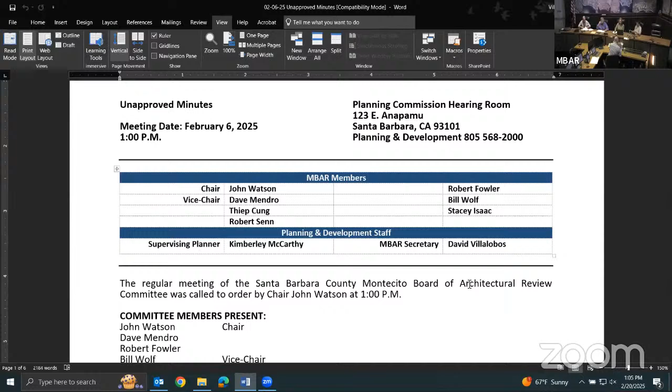Yeah, I thought I made reference to this, and I don't know if it's properly explained in the minutes, but number 2 says MBAR likes the architecture and site layout, and I thought the pool hardscape layout in general needed to be a little more traditional, and I thought I alluded to that in the meeting.

Do you think the item further down, enhanced project design, particularly landscaping, refine details to establish a more resort type environment, covers that, or do you? No, I wanted to give them clarity that the hardscape needed to at least have a bit more old world quality. I thought it was kind of modern in the way it was laid out, and it just needed a little more of a nod to that. I didn't have a problem with the location of the pool and so forth, but just the form of it seemed very modern, and I thought I made that comment.

Okay, so do you have specific language? I think this should be a new item, number 11. Do you have specific language you'd like to suggest? Pool hardscape, to invoke a little more traditional flavor or style. Okay. Is that it? Is that all? Yes, that's that, yes.

Is there a way to add something to number 7? That's what we're trying to figure out right now - can we say that enhances overall presentation of the project? We don't know what that phrase means.

Part of what I was suggesting was that the retention basins were poorly located and they compromise the ability to create a nice perimeter presence and a resort style presence to that project. When you have retention basins, they tend not to look good right in your face. So if there's a way you can phrase that - you have great command of the English language, maybe you can come up with something.

Those are two different things, I think. No, but there was a couple of locations where that occurred - that was another location. So there's two different locations where alternate stormwater solutions would better this project.

Shall we just leave it the way it is? Is that okay with you, Rob? I was the one that brought it up. Study alternative stormwater solutions - they're on their way to the planning commission. I'm just trying to give them something to hang their hat on. They got more or less positive comments and they have to address some things. Great, I think they're fine - they'll come back with better landscaping.

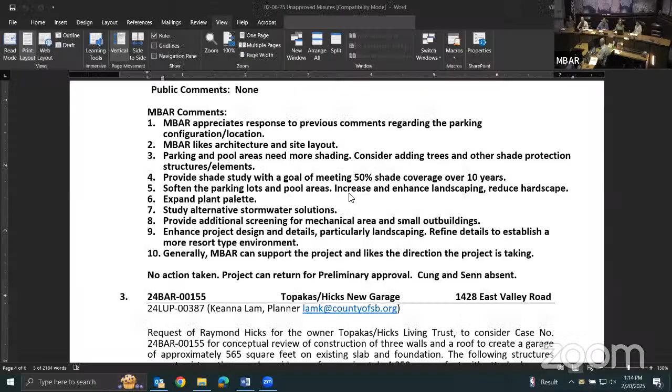488 Barker Pass Road. Is there anybody here for that, please? Hi there - first time. Go ahead, Daniel Widlowski with Richard Beard Architects, joined with Kristen Stoyanova from Richard Beard Architects and Chris Merritt from Ground Studio representing the project, and the owners are listening in. Are we ready? Yes, please go ahead. Okay, sorry.

Can you go to the next page? This is a project up on an undeveloped lot on Barker Pass near the top. It's for a young couple looking to raise their two young boys. It's a high fire area, and the project plans to comply with all of the Montecito high fire regulations and is fully sprinklered. It's a 3,600 square foot residence, 530 square foot detached garage with a small utility basement for mechanical, and the total project size is just under 99% of the MBAR recommended FAR.

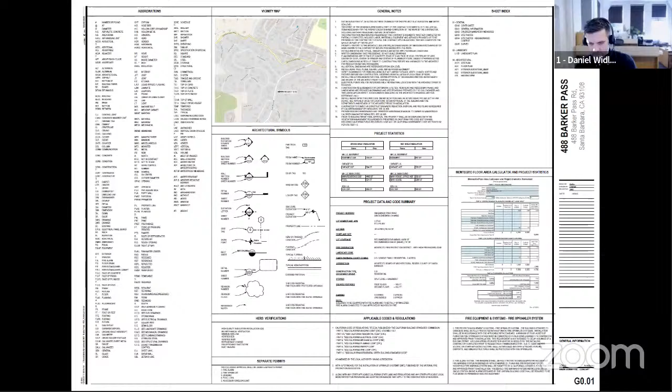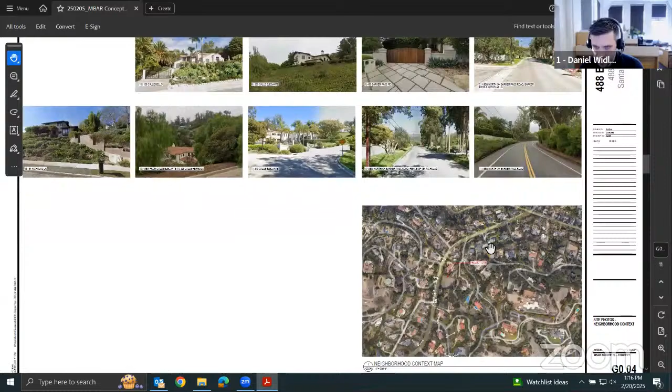Next page. This is our neighborhood context from the aerial - if you just pan down briefly, please. Thank you, you can see it's a classic Montecito level of development, and you'll notice the varied nature of roof styles, directions and massing, and we're drawing from that with our neighborhood context. If you go up to the images, you can see we're capturing glimpses of a few different classic Montecito typologies, many of which are pulled off of the roadway pretty substantially, which is part of our design direction as well.

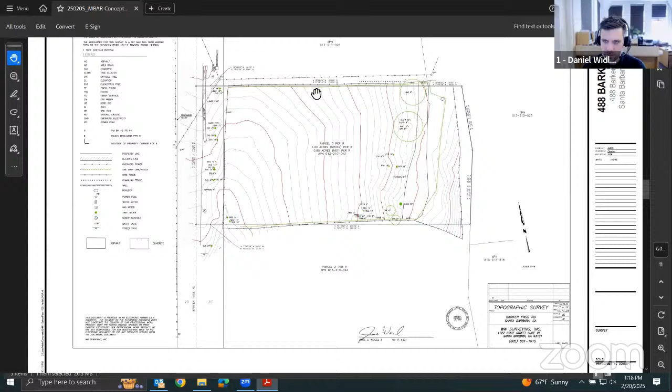Next page. I'm going to skip this page for now, and we'll come back to the landscape plan, and I'll have Chris speak to this part of the project, if you don't mind going to the next page.

This is our architectural site plan. The plan is oriented true north, so you can see we're working with west-facing facade elements. The site has that cross slope, and we're really working to pull the house off of Barker Pass Road as much as we can without requiring a fire truck turnaround. We're trying to nestle it in along the existing contours, again, to work with that landform and prevent the requirement of any extremely large scale retaining.

The maximum retaining wall height at this point is 3'6", and it's actually at the southeast corner of the pool, holding up that existing large date palm.

You'll see the garage is detached, and then we have the long gabled wing there in the middle. That's our public spaces. And then the bedrooms are pulled further up the hill. We have a long bar with a flat roof proposed so that we can conceal PV panels in our PV array. And then the primary is that small gabled structure pulled the farthest up the hill, overlooking the date palm and the pool terrace.

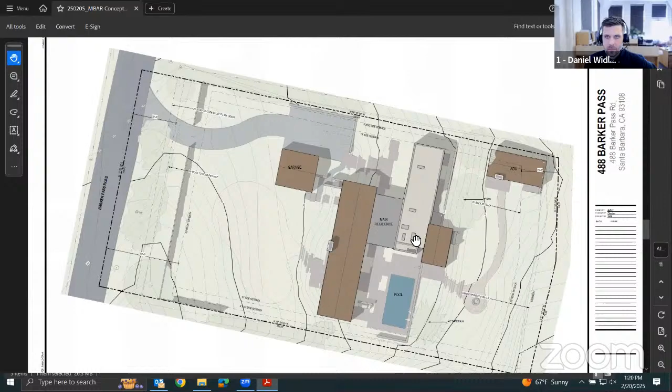Again, we have the public wing at the front of the property, so to speak, and then it gets more and more private as the volumes work their way up the hill. Thank you.

And then the pool and pool terrace are all pulled to the rear of the structure so that they're screened from the roadway and create a nice private feeling in the rear yard. And then much of the upper area, I'll let Chris speak to this more directly, is meant to be returned to the garden state.

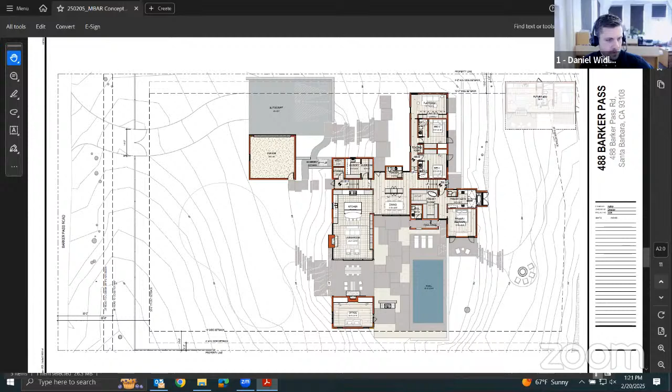So you can see from our exterior elevations, we're trying to draw from the historic context of classic Montecito and Santa Barbara language, paying a nod to the local vernacular of the agrarian region we've settled in, and elevating it to be a little bit more in tune with a modern family and their lifestyle. So you'll see common material elements here: stucco render with a smooth skip trowel finish, some limestone intermixed with some Santa Barbara sandstone.

And then in this rendition, we're showing a clay tile roof. We're using the site and the topography to try to conceal the massing as it works its way up the hill, and it's a one-story house. We're well below the max height limit with any of our ridge lines. And the garage is turned with a single window facing the street to be a charming entryway to the property.

And then the lower elevation here, the east elevation, you can see we're nestled into that hillside. So this is from the uphill looking down the topography. You can see the bedroom wing and the primary wing are sort of buried in the hillside a little bit in this view. They're not really, but they don't project much if you're looking at this from the uphill side where you might be trying to look over the building.

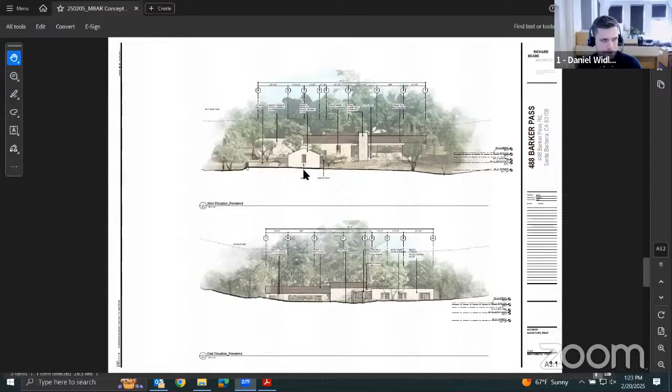Next page. These are the long sections through the site, looking at how the massing steps its way up the hillside, revealing each volume sitting on a portion of the property that's level to it. So it's a multi-split level house, but again, all one story as it climbs up the gentle slope.

On the top elevation, you're looking at the backside of the office, across the pool terrace to the dining room and bedroom wings beyond. You can see the garage on the left, tucked down in the hill. On the lower elevation, you're looking through the auto court at the garage, again, not facing the street. The steps climb up that slope to the front door, between the gabled volumes and the flat roof volume there, in this moment where the landscape is extended across the site.

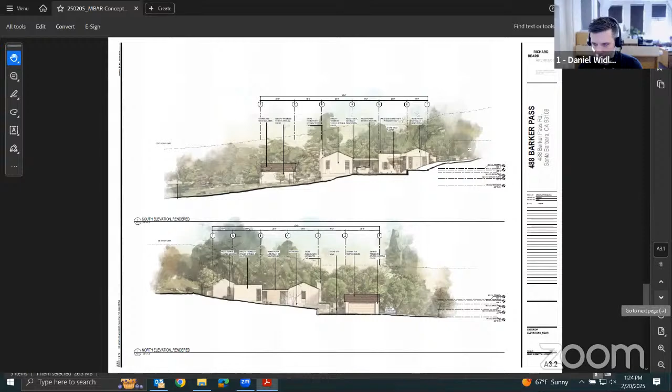If you go to the next page, we have a massing view to help illustrate how these forms unfurl on the land. Probably familiar by now, but the small garage and then the long gabled volume with the stone fireplace is the main public space, with the bedrooms tucking in behind, and the pool terrace. You can see the existing vegetation rendered here in a kind of transparent green.

If you don't mind going back to the landscape plan, I'll let Chris Merritt speak to that. Thanks, Daniel. From the aerial axon perspective you saw on the last page, the bulk of the work from a landscape perspective was siting the building with Richard Beard's team, seeing how we can nestle it as much as possible and get the site as balanced as we can.

It's early days from a landscape perspective, but we're looking at roughly about 500 cubic yards net import, or less.

From a design intent perspective, we really tried to consolidate most of the public space and contemporary landscape directly around the main house, between the bars of the building. Then on the east and west side, reintroducing oaks. The neighbors to the south and north have existing live oaks, so we want to continue that oak woodland thread. Our goal is to create a reinterpretation of an oak woodland on both the east and west sides of the property, again consolidating more of the paving and hardscape directly around the house, so the building is enveloped in a garden and nestled well into the site.

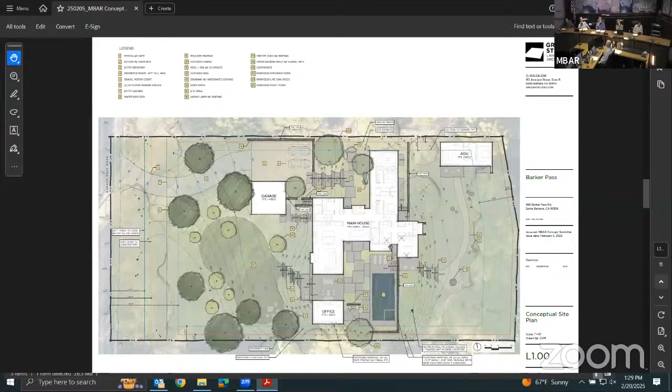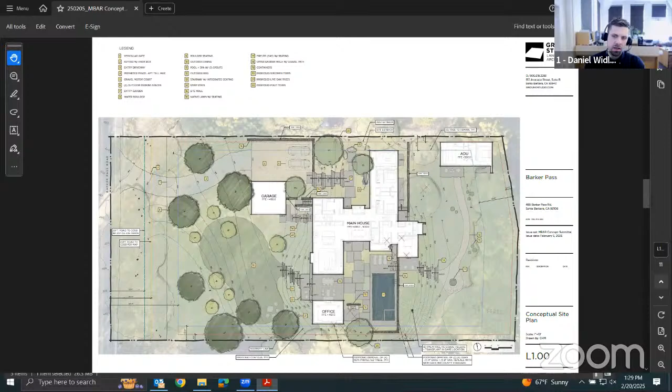In working with making sure that each of the bedrooms can daylight out for emergency egress, we've pulled some of the volumes so that the rear face, the uphill side, is level with the terrain as you exit. That required some imported fill on the low side to hold them up, if that makes sense. And we've done that in a few instances to help balance the cut where the pool exists and where some of the other parts of the massing exist.

Yeah, where the pink line is, where I just drew, that's existing grade. So the finished floor of the house is set at that pink line, which is essentially the midpoint between the two bars of the building. So we're cutting a little bit uphill with the goal of keeping the walls low, like Daniel said, 42 inches high max, and then having to fill on the downhill side as a result.

Okay, great, no more questions. Thank you. Todd, please.

Where's your ocean view? I thought that area had ocean views, or at least some places around. No views on site, unfortunately, none this time. Okay, I'll clarify, if you walk right up to the very top you get a very understory sneaking ocean view, but certainly nothing we can capture from the house, unfortunately.

Okay. And then what is the thinking with the first thing you come up to being the garage, and it's really understated? What is the thought behind that? We're interested in your comment on that.

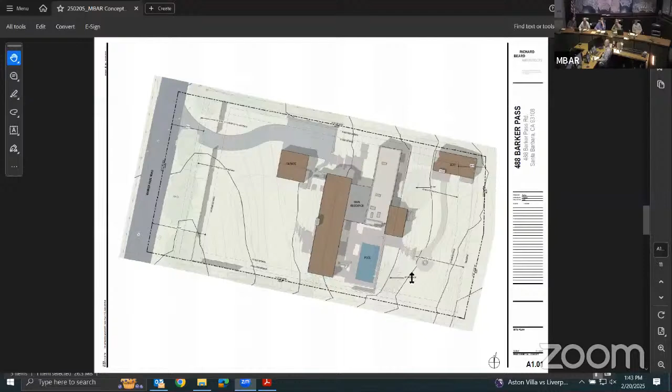I do feel it's a nice project, and as far as the garage goes, that's where I'd almost like to see a little bit more interest in some of the architecture, because the garage feels a little understated as the first thing you arrive at.

But I think if you do the front door and some of those enhancements, it'll come together nicely. So that's all I have to say.

Thank you. I don't think you should wait to go to the fire department until you file the LUP, because my guess is the fire department may very well ask for things. I understand at this time they're asking for full turnarounds.

Which we see in almost every project that comes through Montecito. That happened maybe two or three meetings ago, where people reported the fire department was not permitting anything except a turnaround, which are fairly large things on the ground.

It could move parts of the buildings around, so I would recommend you do that long before you get to the land use permit.

I think that the portions of the project that I see are pushing the north property line. I think that if we're going to maintain the perimeter hedging everywhere and the probable 5-foot area around each building, and then also at the parking area...

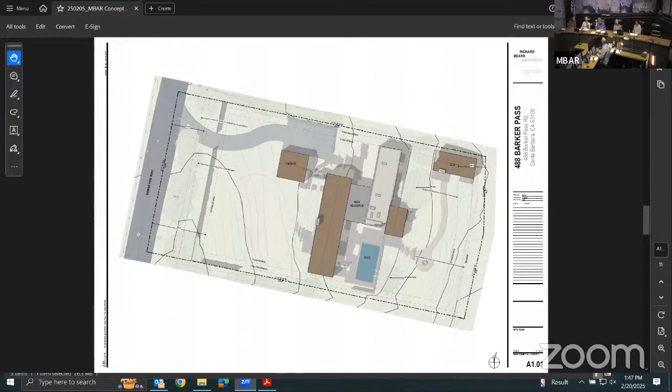Thank you, appreciate all your comments. And please do communicate with the neighbors. Absolutely - next steps are fire, neighbors, and study that roof on the north property line. Thank you so much.

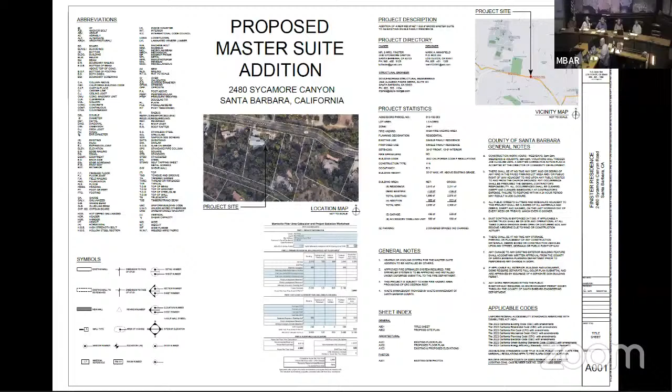Anybody here, or is it online? Yes, can you guys hear me on my end? Yes, I can - is this Mark? Yes, it is. Okay, please go ahead. Good afternoon, board.

My name is Mark Mansfield. I'm the designer/agent for Mr. and Mrs. Brian Finster. I also have the owner, Brian, joining us, just in case I don't have the right answer - he may have it for you.

So basically, what we're proposing to do here is add a master suite to an existing single-family residence on Sycamore Canyon, 2480 Sycamore Canyon. It's basically 800 square feet net, 833 square feet gross, and it's pretty simple - not a complicated design by any means.

We're far enough back from Sycamore Canyon Road, with an existing masonry wall about 6 feet tall, so you barely see the home or the addition we're proposing from Sycamore Canyon. That's probably a good thing for the Montecito area.

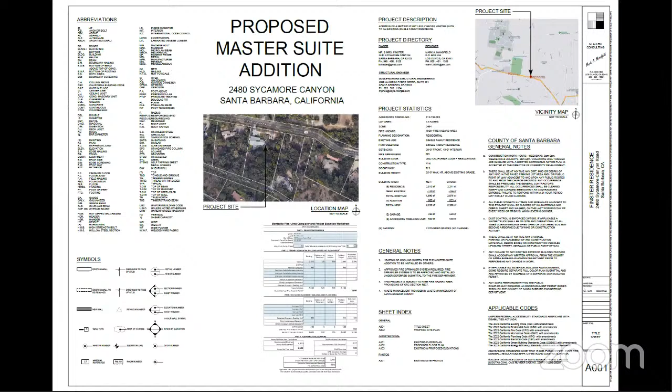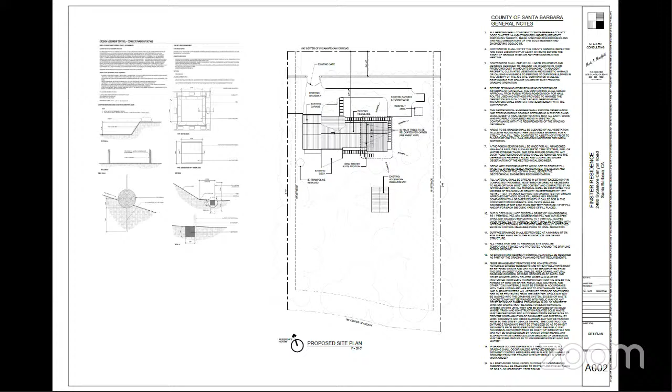If we want to, let's go to sheet number 2. There we go - there's our proposed site plan. I may want to skip back and forth a couple sheets to give you a clear picture of what's going away and what's proposed to come in. Let's stay right there - the existing floor plan. Go one more sheet, please. There we go - there's the existing floor plan as it is today.

What we want to do away with is this existing bath. The master bedroom as it is today is where my cursor is, below the lower right corner of the building. The Finsters have a 5-member family, three kids, and they all deserve their own bedrooms. So we want to take that master bedroom that's there today and do away with it. If you go to the next page, there's the master suite.

If you look a little closer at this drawing, you can see where the existing is being removed and where the new is being added - it gives you an idea of what we're doing away with and what we're adding. Basically, the existing master bedroom will still have its own bath, but the new master suite has its own bath, and the owners want an office as well. And one of the existing bedrooms above the existing master bedroom is enlarged a bit.

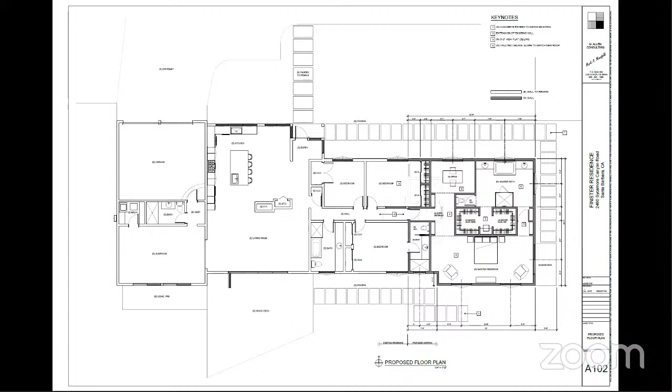If you go down, let's see how many sheets, one more sheet, please.

Elevations. So what we're looking at here is we've got our existing elevations and our proposed elevations together, and you'll be able to see where we're adding that new master suite. The very top south elevation shows where we're adding the master suite. We want to match as much of the existing structure as possible, so it looks like it was all built at the same time. I think we've accomplished that.

We went back and forth. If you're still looking at that top proposed south elevation, we were going back and forth on sizes of windows for the new master suite, and per the owner's request, we didn't want them to be too big. They want to have some privacy in there, so that's the reason for the size of those windows.

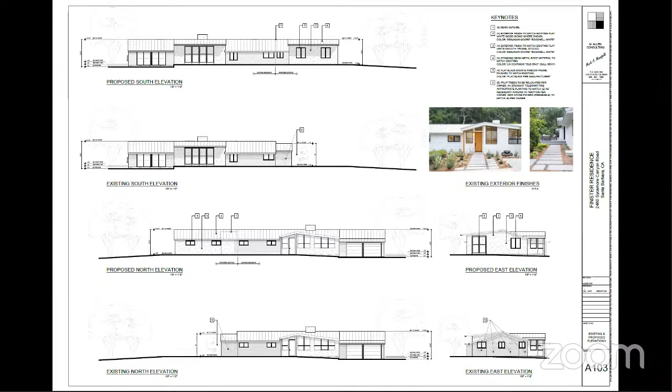The exterior finish, we're matching the existing, of course. And if you look at the photos that I've attached, the existing exterior finish on the right side of that page, you'll notice that it's white. And my notes, there we go.

Can you scroll down just a tad bit so we can see the keynotes there? I'm sorry, scroll up, excuse me. Scroll up, there we go, right there. So what we've got is two different exterior finishes going on, as you can see in the photos.

One finish is the white smooth trowel stucco, eggshell white. And then we also have this white wood siding, also eggshell white. So we're matching that smooth trowel stucco finish on the master suite addition.

I think that'll be a nice look, to where you've got it separated from the stucco finish to the wood siding, then back to the stucco finish, like you do with the rest of the house.

If you scroll over to the left-hand side and look at the elevations again, you'll see how it breaks itself up like that. You can see that in both the proposed south elevation and the existing south elevation. You've got the white siding, then the stucco finish, then it goes back to the siding. So we decided, let's have the new addition have the stucco finish.

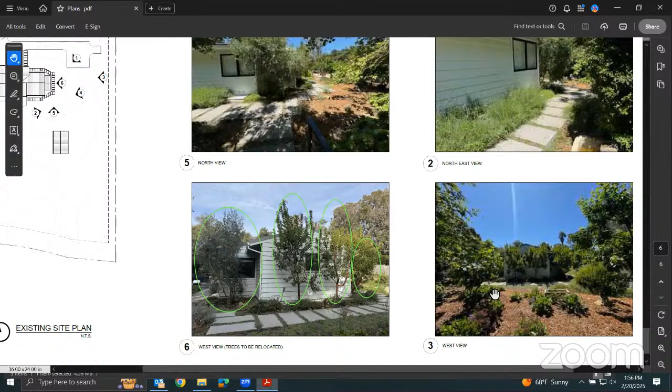If you go up to the upper left of this sheet, I think I have a little better explanation of what they are: trees, plants to be relocated. That's just 2 strawberry trees.

Mark, so this—this is our first review. I don't know if we need to get into that much detail at this point. Oh, good, that's good news, because I'm not a big landscape guy. Okay, can we move on then, please?

We can. That's basically all that I want to bring to your attention. It's just basically what we're proposing to do. Thank you very much, that's it. Questions, Robert?

No questions. Stacy, questions? One question.

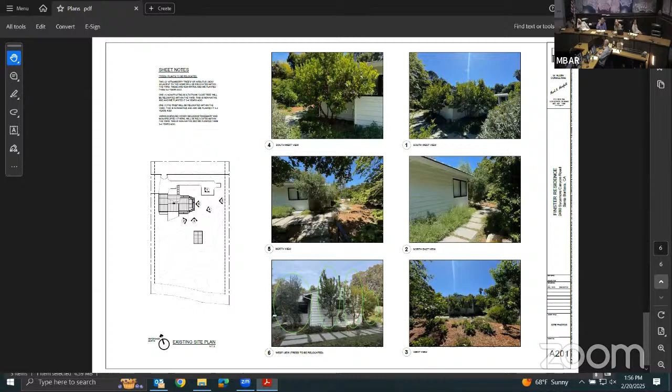Why did you go from the horizontal siding on the same plane on the north face of the house, on that same plane without any variation to the front facade, and then transfer it on the new addition just over to smooth stucco without some form of relief or transition? Are you talking about the proposed north elevation? Correct. Why did I do that?

Well, okay, I had a feeling you were going to ask me about that. We may not do that, we may just carry the siding all the way to the end. But then what do you do when you wrap around the corner there?

If you go down to the proposed east elevation, lower right corner of the sheet, that's all proposed stucco finish. So what you're saying, I understand the question. That does make sense, and that's something we can visit and discuss.

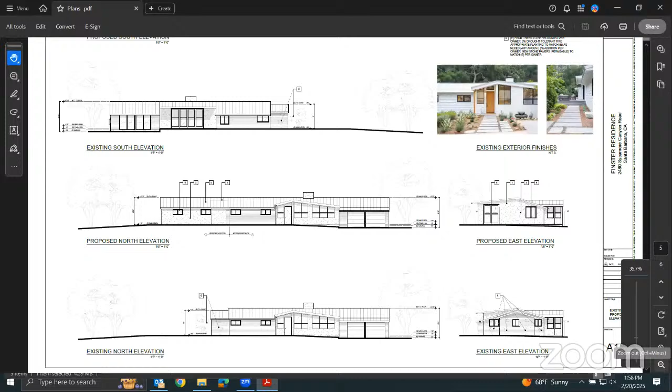If you can zoom out a tad bit and go up to the proposed south elevation, a little further up the page. We like that look where it divides itself up from the stucco finish to the siding. So I hope I answered your question somewhat.

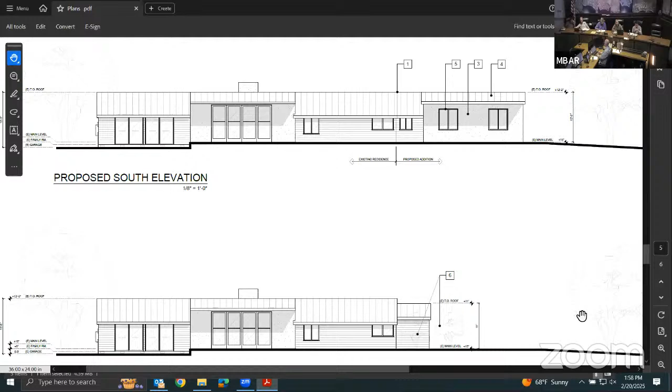We could consider that on the other side, on the back side from that elevation. That was my only question. All right, questions please. No question, Rob, questions please. Can we go to the driveway, please?

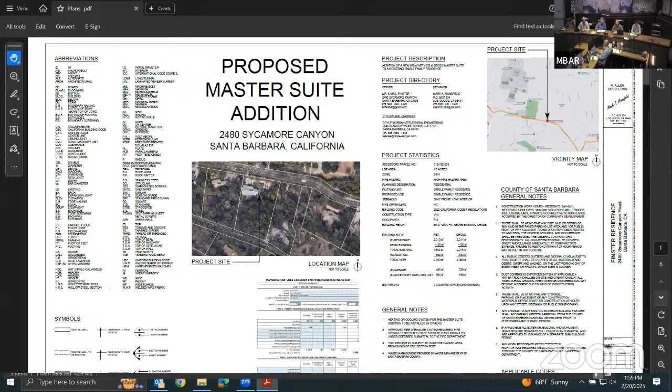You just had it. Yeah, right there, you go. You passed it right there.

Did you consider, first of all, what is the thinking in terms of the driveway and the function? Is this in response to fire department concerns, or why did you bring all this paving across the front of the house and create a whole other parking lot at the front? What is the thinking there, please? And with that in mind, did you consider stepping the new master wing back rather than having it in the same plane, since you seem really pinched because of it?

Let me see if I can understand the two-part question properly. So what you're stating is that all the parking you see in the site plan is existing, we're not adding any new parking at all. You're talking about the pavers that are wrapping around.

No, I'm reacting to this long spur of a driveway and new parking area. I guess I'm wondering, did you look at other solutions where maybe you didn't need to go all the way across the front of the house with paving? Oh, I see what you're saying. Okay, so again, I just wanted to make sure I understand, or that you understand as well.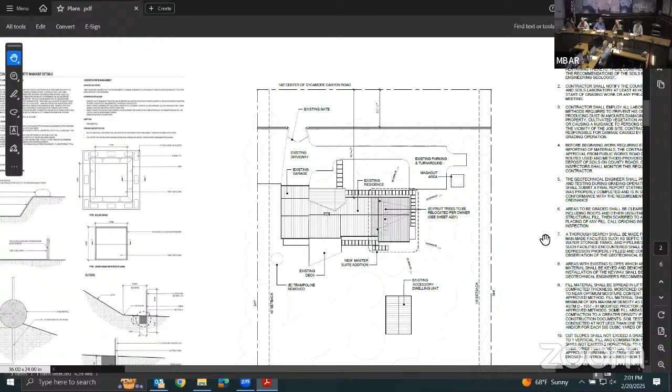So then the other question was, did you consider stepping the new addition extension back so it wasn't so pinched, and so the new addition wasn't in the same plane as the rest of the house? Yeah, we had discussed that, but the owners preferred this look better simply because they've got that accessory dwelling unit in the back, and we didn't want to get too close to it. Also there were some other trees that were much larger, and it would have been a more complicated process to move some bigger trees perhaps, and so on.

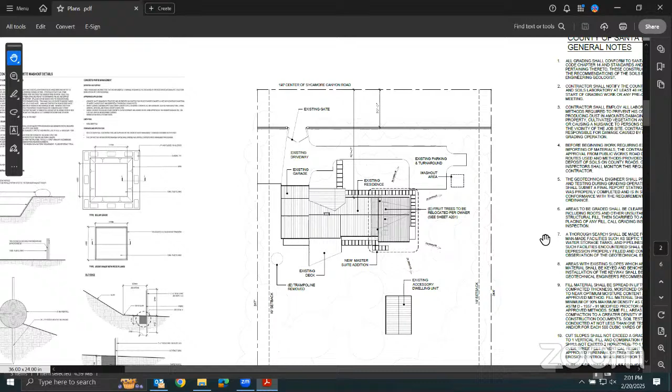And it's like everything else, cost comes into the picture as well. Also, if you go back to the floor plan itself, the proposed floor plan, one sheet down, or two sheets down, one more. It flowed the way we went. Oh, back up. It just flowed the way the owners preferred to have the floor plan designed, the way we went about it.

They like this design, it works for them. They didn't have a problem with that long extension of the elevation in the front. Thank you, that makes sense.

Were you planning on repainting the whole house when you finish this project, please? No, we hope not to. It's not cheap.

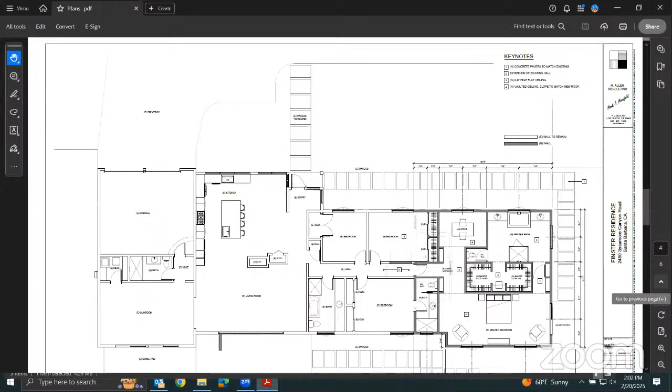If you go back to the elevations, are you aware that we only approve metal roofings with a matte finish, please? It has a matte finish. Excellent, okay. The owners had to do that matte finishing after they bought this property, from what I understand. It didn't have it when they purchased this property, and then they had to come back and deal with that.

Okay, public comment. Is there anybody that would like to address the board on item number 2480 Sycamore Canyon Road, please?

No requests. Okay, this is the first time we see this project.

Comments, Robert? I feel it's a modest and well done project, and I think we should just move it forward.

Stacy, comments please. I agree with Robert. It's a modest project, and overall pretty agreeable. Just two comments when it comes back, and I'm fine with it moving to preliminary: restudy the window at the office, perhaps making it larger so that there's some relief in the facade, so it doesn't feel like a long tract home. And then just think about that breakup, because usually if you're going to change materials, there's generally a shift in the planes and the spaces just to justify that change of material. But I would say it's still fine to come back for preliminary if you would just please consider those factors.

Yeah, comments please. It's definitely a modest project. Just a comment, I'm looking at the scale of the master suite compared to the scale of the whole house. It seemed to be rather large, but that's not what we are here for, so I think it's okay.

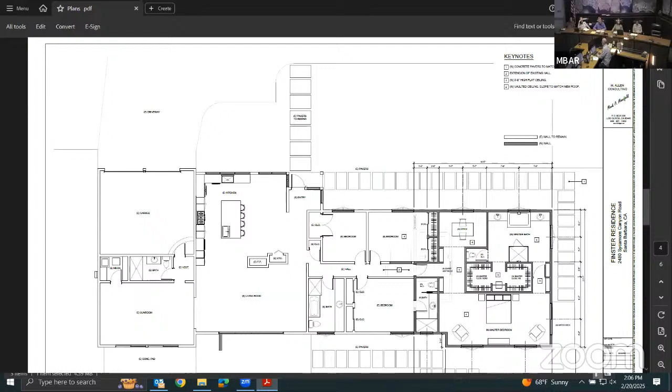Item number 3, 220 Hot Springs Road. And for anybody that doesn't know, item number 5, 227 Hot Springs Road has been continued. If you were here for public comment, I just wanted to tell you so you weren't wasting your time. Okay, item number 3, please, 220 Hot Springs Road, please.

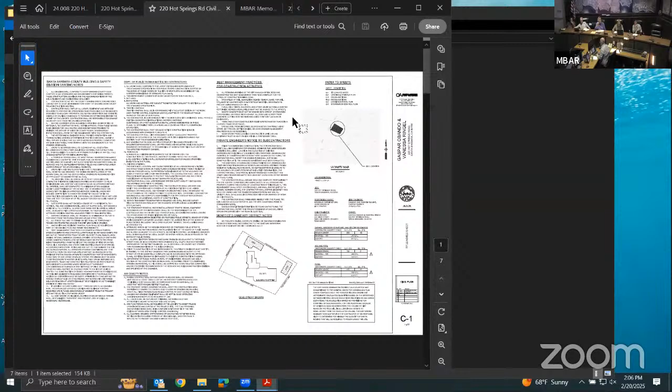And we have a memo on this one. It has to do with the change to the project description. Okay, we have two. Let's go to a memo, I didn't know that that was in there.

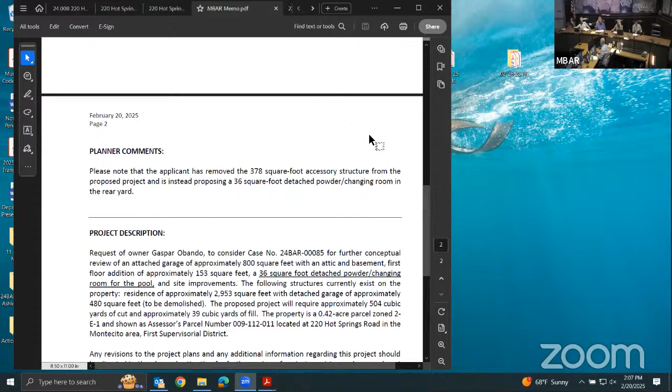Okay, so please note that the applicant has removed the 378 square foot accessory structure from the proposed project and is instead proposing a 36 square foot detached powder changing room in the rear yard. I assume that's next to the pool or something like that.

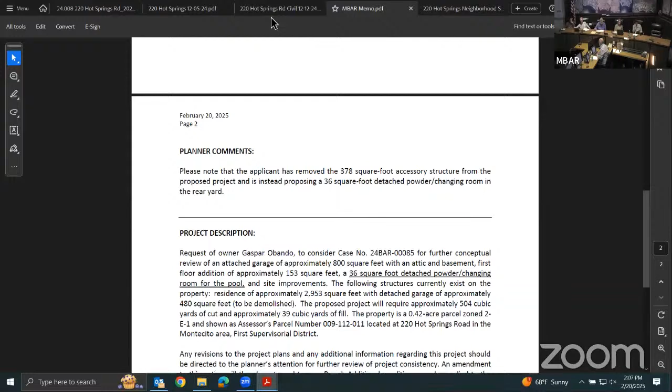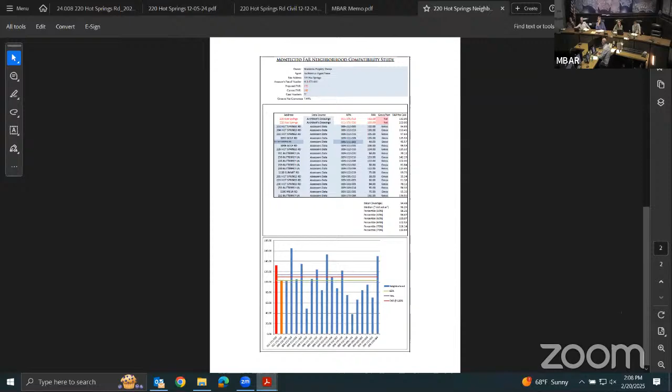Okay, so that's it. And then the other sheet, next down. And that's how it works out. I think the next sheet is, yeah, that's.

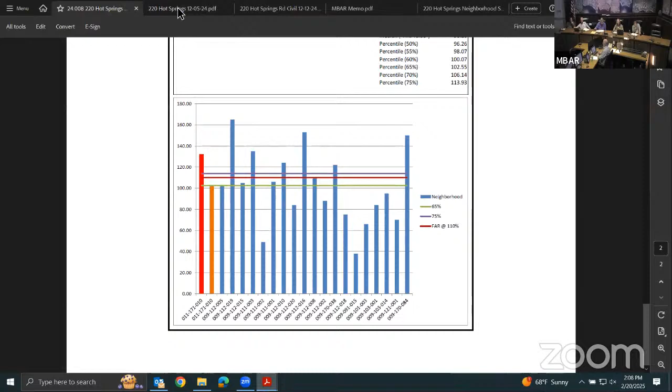Hello. We're here to address the comments from the last hearing. So as you saw from the planner's comments, we removed the 375 square foot accessory structure.

The second story of the garage and around 20% of the paved motor court. This allowed for more landscaping and a defined entry from the driveway to the main house. We also drastically reduced the amount of glazing on the front of the garage for the doors and the windows. We lowered the height of the garage itself and the square footage.

We are using Santa Barbara sandstone as the border and curbing on the border of the motor court paving. Our garage access and part of the existing house facade will have natural stone cladding. The plant palette was revised to be more Santa Barbara appropriate.

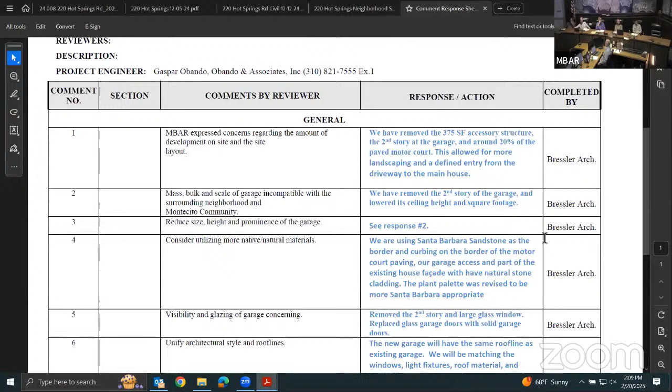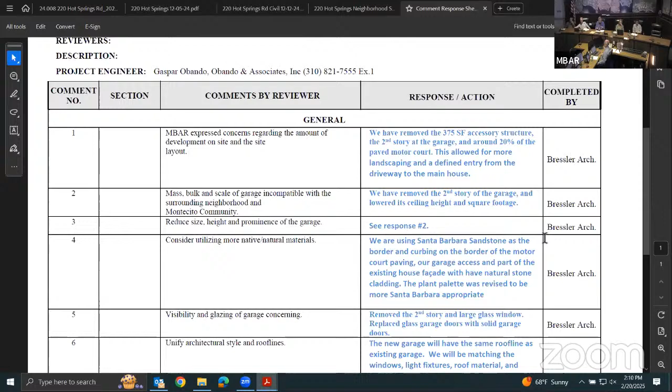As I mentioned about the garage, we drastically reduced the amount of glazing and removed the second story and revised the roof line of the garage. The new garage will have the same roof line as the existing. We'll match the windows, light fixtures, roof material, and stucco color to the existing house. And we made the front entry more prominent. It becomes the focal point upon entry to the lot instead of the garage.

One of the comments from the previous meeting was that the garage was sort of a massive structure that you would see as soon as you came into the property. So we reduced the scale of it and accentuated the entry.

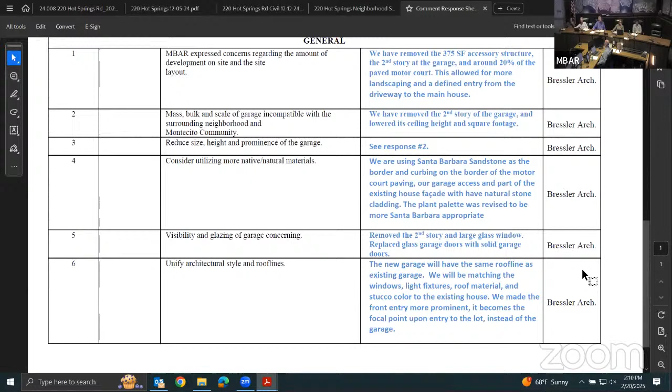Did you want to show us those on the plans, please? So just before you do that, there's a project that we're reviewing, which is the garage, the entry, and the house on the right-hand side of that rendering. And then there's an ADU on the left-hand side, which we do not review. So just so members of the board, there's that sort of little piece of structure that's not anything within our review capabilities, okay? Please, go ahead.

Okay, so yes, in the rendering on the top left, you see the garage, the proposed garage with the front entry and the existing house on the right. And then, oh, I won't mention the ADU. Okay, can you zoom out?

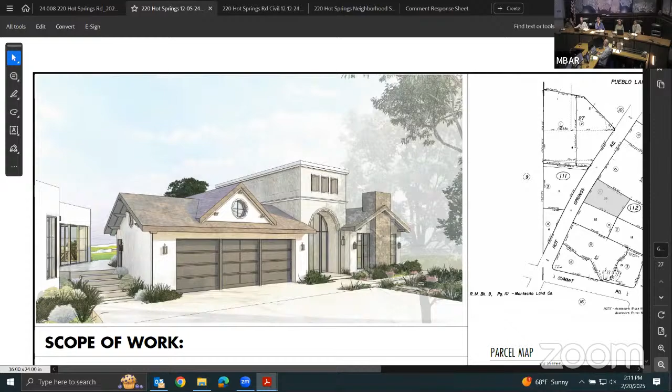It's David, right? David, could you switch to the next page? Okay, next page. Here's the existing house. Next page. Oh, if you go back, the existing garage is sort of second row, far left, that one, yes. We used that as the inspiration.

We're tearing that garage down, moving it towards the front. Next page. Okay, so here are some views.

This would be the view from Hot Springs behind the fence and hedges. You see the proposed garage on the left, on the upper left, with the new front entry and the existing house on the right. And then the view below is from the rear yard looking at the back of the garage, front entry on the left, and the existing house on the far left.

Next page. And then the top view is looking at the back of the garage, the back of the entryway, and then the existing house. And then the bottom view is the front facade, a little bit different angle. Next page.

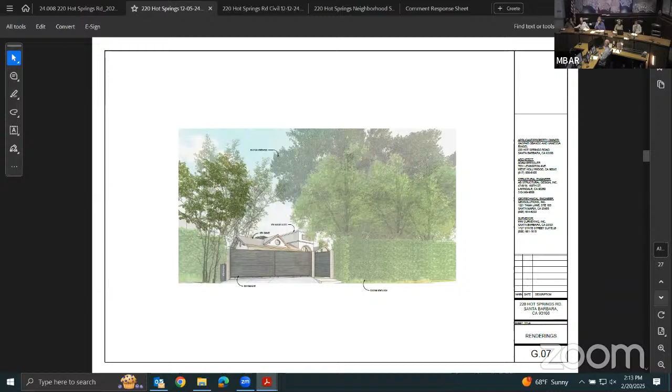Next page. I think that's everything. Is that it? Yes, that's everything. So you're done with your presentation? Yes. Okay, excellent. Whoops, not quite excellent yet.

Stacy, questions? Going back, did you guys study - now I see that you took off that other building that was in front by the oak trees. Did you look at positioning the garage at a 90-degree turn? So when you're coming in, you could then turn to the right and go into the garage instead of necessarily coming straight into the garage doors as you enter the lot? Did you study that?

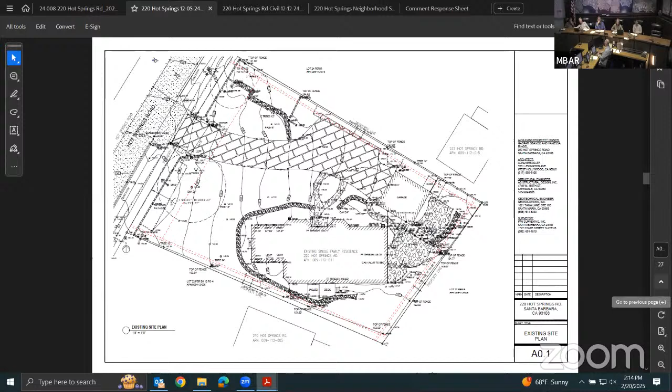I think we were trying to avoid that. We were trying to create sort of a kid's play area behind the garage. So if you look at the proposed site plan, there's a lounge area for adults behind the garage. It would be to the right of that lounge area. Keep going.

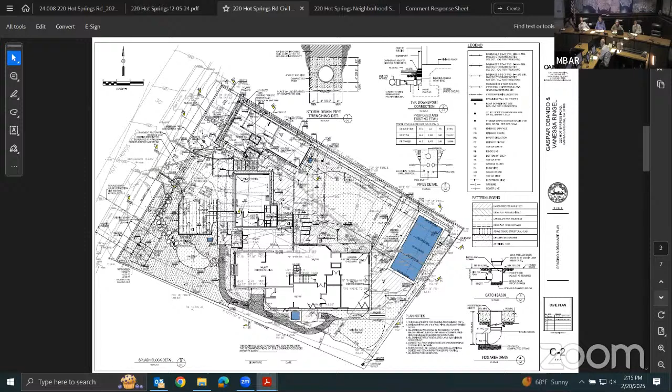Wait, I'm looking for the site plan. I'm looking at Arcadia Studio, the landscape plans. Is there anybody from Arcadia to represent their work? Hi, yes, I'm on the call.

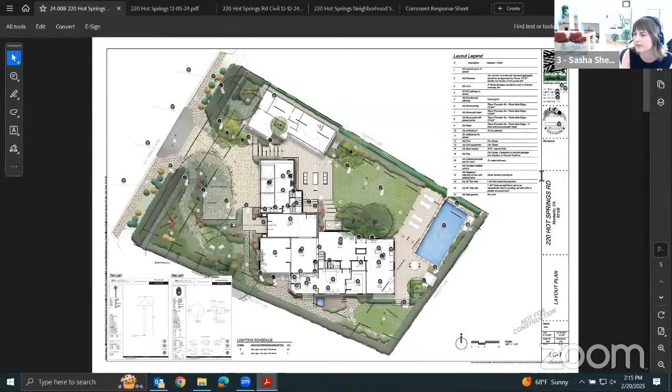The child's play area would be on the lawn to the right, and I think the garage is helpful for separating the space from Hot Springs Road, which we know is pretty popular and busy, also for noise, to create more of a front yard, backyard setup.

The question was, did you study it in the other location, 90 degrees the other way? For the garage, I'd leave that to the architect to answer. I believe that was one of the comments we had in the last review with you. Any approximation to that oak tree would compromise the roots, so we were trying to keep it away.

The whole idea was to enclose the backyard to have a more silent setup for the back rooms of the house. Did you consider just doing a site wall to separate the front from the back, as opposed to using an entire structure? No, we did not consider that.

And then two, the central part, it's almost like an appendage on the back of the garage in some of the elevations. Is that with all glazing? Can we look at that, David, in the elevations?

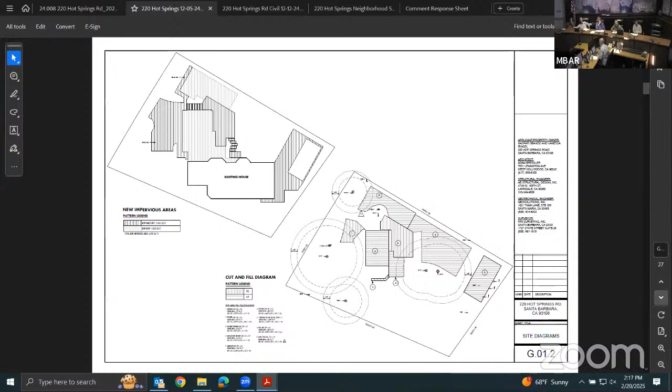It's a staircase going down to the basement. I'm trying to understand that. You passed it, David. Go back to the renderings, back a couple sheets, because it really shows up in the rendering, right there.

So that's just to accommodate a staircase? Yes. And we're using that staircase to provide a little bit of light to the basement, that's why we have the large windows. Okay, all right, those are my questions.

Chip, questions please? David, can you go back to the site plan, the landscape plan? Okay, so my first question is the pool and the pool cabana is within the rear yard setback.

My second question would be for the garage, the back, the driveway in front of the garage. How many feet is that from the garage door to the edge before the tree? Do you see where the round tree, the trunk is, right in front of the garage, next to the front door.

I guess my question is, what is the backup distance? It's about 30, huh? About 30, I'd say 35 feet. So how deep is the garage? They're pulling underneath the tree tip, that space is under the tree.

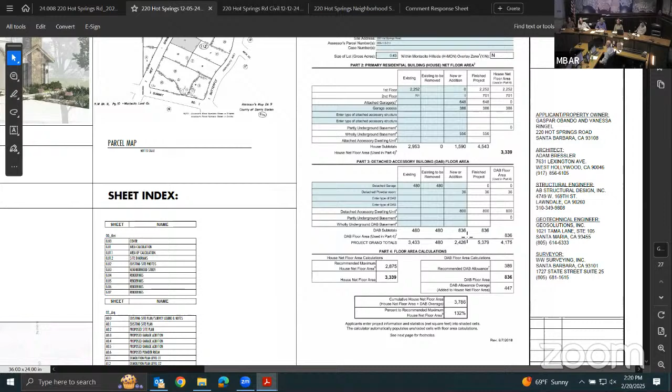Robert, questions please? No questions. Rob, I just have one question, and it's probably more architectural so I might be off base, but the center entry feels to me like it's a little different architecturally than the wings. They look like two different buildings to me, I guess. What is the thinking architecturally?

Trying to give some curb appeal, it's sort of to act like an anchor for the house, add some variety of scale, I guess you'd say. As opposed to maybe adding more of a tower element with a roof on it, or something with a roof that matches the wings, that's what I was reacting to. Oh, like a sloped roof? Yes.

Did you study that or think about that? Yeah, I think we preferred to introduce a little bit different language for that accent piece. We wanted to make the building work with the whole concept.

I don't know if we're supposed to talk about this, it has a relationship to the ADU, sort of. We do not talk about the ADUs here. If you don't like it, vote for different people in the legislature.

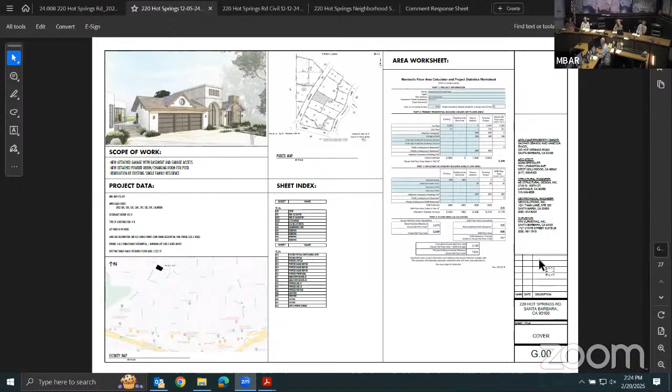There's a floor plan, maybe it's on the landscape plan. Yeah, this is the new two-story element, or story and a half element, correct? From my point of view, you're over the FAR.

This does not look like a consistent element. And if this garage was somehow relocated, you could substantially reduce the square footage on the property, get it much closer to the FAR. You're at 132; I believe the study I did showed about 75%, which is my line, is about 113. I think that would go a long way towards solving this problem.

And then Stacy's comment was somehow create a wall from there to here to get your sound privacy. I certainly understand that on Hot Springs Road. I think it's a very well thought out idea. But I think that this element right here is causing you a lot of angst, or causing me to have angst - I won't speak for the other members of the board. So the question is, is it possible in your mind to design the project to substantially reduce or eliminate this two-story element, please?

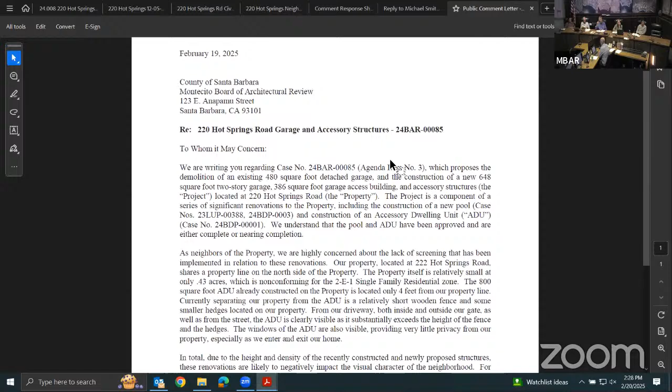You regarding case number, which proposes the demolition of an existing 480 square foot detached garage and the construction of a new 648 square foot two-story garage, 386 square foot garage access building, and accessory structures. The project is located at 220 Hot Springs Road. The project is a component of a series of significant renovations to the property, including the construction of a new pool and the construction of an ADU. We understand that the pool and ADU have been approved and are either complete or nearing completion.

As neighbors of the property, we are highly concerned about the lack of screening that has been implemented in relation to these renovations. Our property, located at 222 Hot Springs Road, shares a property line on the north of the subject property. The property itself is relatively small at 0.43 acres, which is non-conforming for the 2E1 single-family zone. The 800 square foot ADU already constructed on the property is located only 4 feet from the property line. Currently, separating our property from the ADU is a relatively short wooden fence and some smaller hedges along our property.

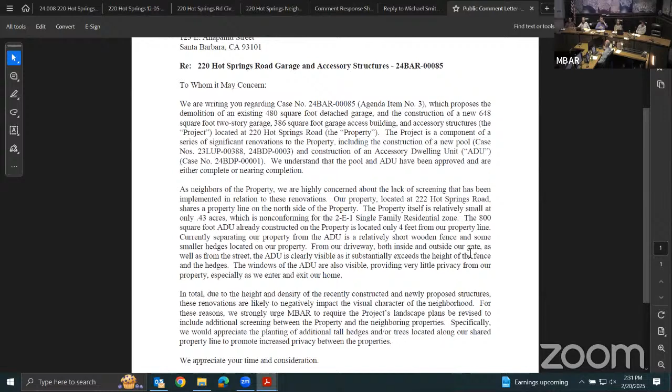In total, due to the height and density of the recently constructed and newly proposed structures, these renovations are likely to negatively impact the visual character of the neighborhood. For these reasons, we strongly urge MBAR to require the project's landscape plans to be revised to include additional screening between the subject property and the neighboring properties. Specifically, we would appreciate the planting of additional tall hedges and/or trees along our shared property line to promote increased privacy between the properties. We appreciate your time and consideration. Michael Smith.

Is there anybody else that would like to address the board on item number 3, 220 Hot Springs Road, please? No additional requests. Okay, so we have seen this project once. Really? I thought it was more than once. Okay.

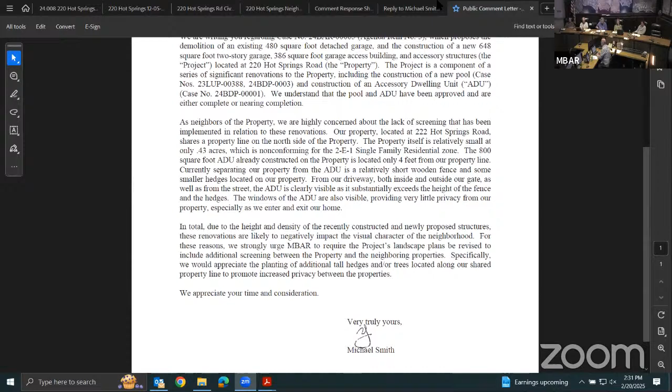And we are on for concept, further conceptual comments. Stacy, please.

I'm not inclined to pass this to preliminary at this point. I think it has to come back for more conceptual review, especially having to do with the inconsistency of the architecture still in the front. I do appreciate, though, that you guys eliminated one building and dropped the height down on the garage, but I think it still needs to be studied with moving it. You did originally structurally have all of your parking to save the tree previously, and I know that you can still do that with the garage building if you move it, but study it. Maybe I can be convinced, but a more convincing, more consistent architecture that matches the existing architecture on the site of the main house in some way or form.

I did notice too, I'm not inclined to pass it with the FAR as it currently is. I see that there's a large basement space. That's correct, below grade. That also is pushing your FAR? It's not? Oh, it's not habitable? It's just storage? We'll get into it later. Okay, that's fine. It's not counted in the FAR. The FAR number you're seeing includes the ADU. Yes, it does, as it should. Yes, but still at 132, it still seems high for this size lot. And also, I think the neighbor has a good point regarding screening, and that really needs to be addressed as well.

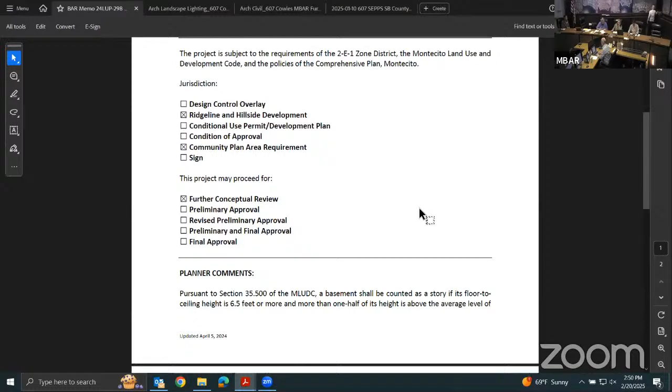MBAR members generally like the architecture and design, mass, bulk, and scale appropriate to the neighborhood. MBAR members appreciate efforts to protect the large, significant oaks on site.

Some members requested that the third level above the garage be eliminated or relocated away from the abutting roadway. One member cannot support the project with the third level element.

Study options to relocate the parking areas to the south side of the property and eliminate the multiple curb cuts and driveways. Restudy and simplify pathways east of the tennis court and main portions of the dwelling. Study options to add more structure to the understory planting design to integrate into the architecture, and confirm that all exterior light fixtures meet code requirements.

We have a memo on this one. Oh boy, all this stuff happened.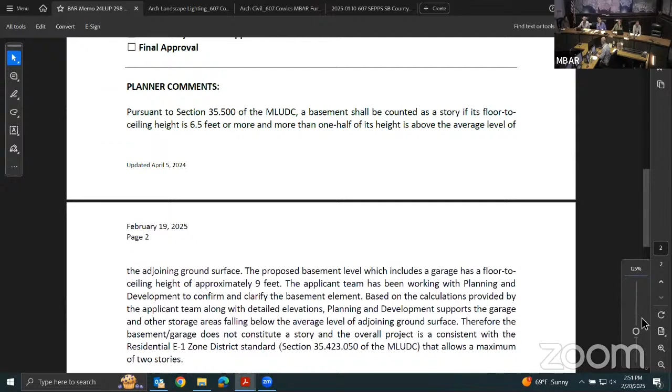Pursuant to section such and such, a basement shall be counted as a story if its floor-to-ceiling height is 6.5 feet or more, and more than half of its height is above the average level of the adjoining ground surface. The proposed basement level, which includes a garage, has a floor-to-ceiling height of approximately 9 feet.

The applicant team has been working with planning and development to confirm and clarify the basement element. Based on the calculations provided by the applicant team, along with detailed elevations, planning and development supports the garage and other storage areas falling below the average level of the adjoining ground surface.

Therefore, the basement garage does not constitute a story, and the overall project is consistent with the residential E1 zone district standard, which allows a maximum of 2 stories.

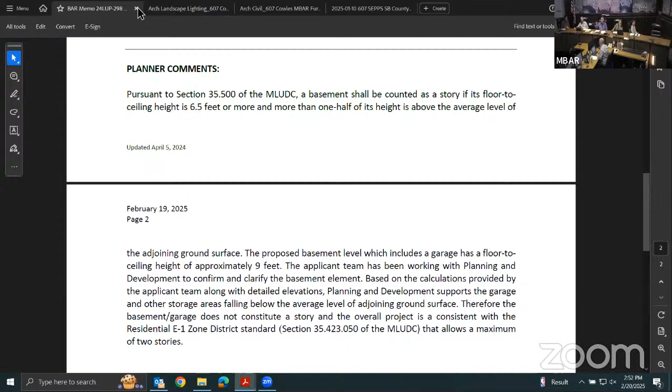Okay, anything else before... anything else? No. Floor is yours.

Thank you, Chair Watson. I'm Steve Fort with SEPPS Land Use Consulting, sitting in for Shelby today. With me in person is Andrew Petrovsky with Michael Imber Architects. I believe online we have Alexander Ford, also from the architectural firm, and then Cheryl Fields and Scott Schrader from Scott Schrader Landscape Architecture Firm.

We are back for further conceptual review. I won't repeat the minute comments that you just went over.

We realized that there wasn't a complete consensus about that tower element, we'll call it the taller element. But there was some support, and unfortunately, some of the members who supported that are not here today.

There has been a bit of a redesign to that portion of the project that Andrew will go through. I was going to mention the planner memo, but you touched on that, supporting that it's not considered a 3-story element.

We do have an additional rendering, hopefully you're okay with taking a look at that. We also have a public comment letter from an adjacent neighbor who opined in support of the proposed project.

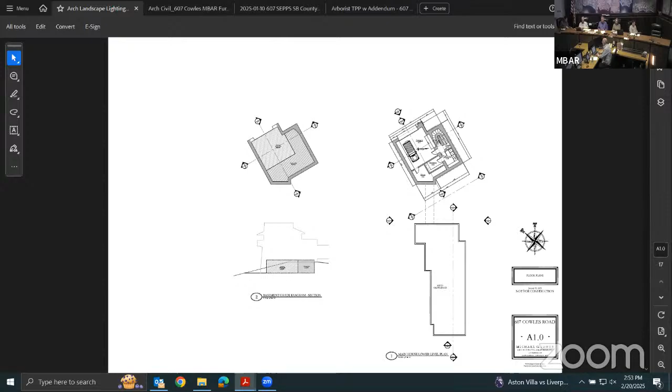I'm going to let Andrew go over the revisions to the project that are addressing comments and the owner's desire for certain elements of the project, and I think we'll go from there. Hopefully you agree that, consistent with the planner memo, we have nestled that portion with some comments into the existing site. But I'll let Andrew take over and prepare for questions.

Sure, so just as a preface before we jump into this, I want to say from the start of this project we've wanted to bring some magic up to the top of Cowles Road, like there used to be when the Eucalyptus Hill Mansion was there originally. This tower element and everything else we've planned for this property has been in the vein of trying to enhance and preserve the character up there.

So going back to the notes, MBAR members generally like architecture and design, mass, bulk and scale appropriate to the neighborhood, great. Feel like that's been a consistent thread through the first two times we've been here, and we've tried to continue refining some of the elements, which you'll see today.

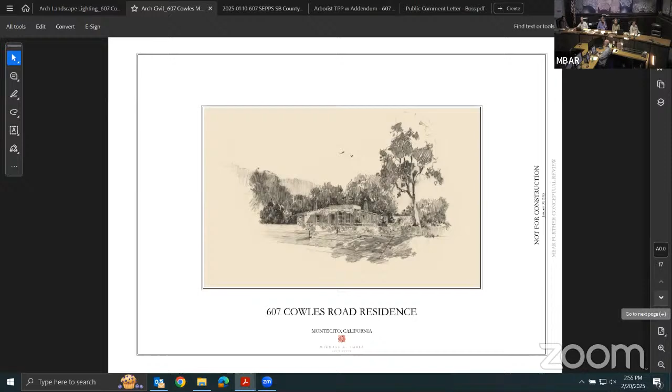We've also taken efforts to get rid of a generator, balance grading. We had that lengthy discussion with Bill Spiewak last time to really clarify all the oak tree protections. And we've also reoriented, added and subtracted curb cuts in order to make this project as optimized as we can.

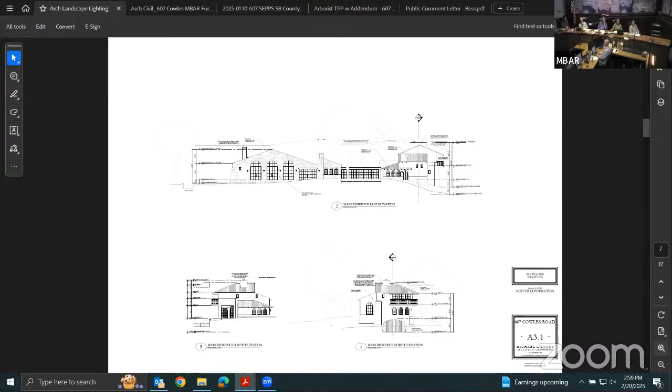Okay, so the elevation that we've all been trying to come to a consensus on is that one in the lower right. That's the one that is the most prominent, I guess you could say, in terms of showing that tower element that we've been proposing. We've taken a look at this and how to make the scale more compatible to the neighborhood and create something that's more charming and better scaled while still keeping that sort of carriage house vernacular that we're going for.

You can see where the chimney is - that all used to be a, let's call it a monolithic tower element that was conforming to the code by being that tower element that you get the extra 8 feet from. The normal height limits, we've gone away with that. We're meeting the height limits without that extra 8 feet now, and we've demonstrated that in - there's a roof site plan that we can reference if we need to. But just to talk through it further, we're now not proposing any architectural elements that have to use that provision of the code.

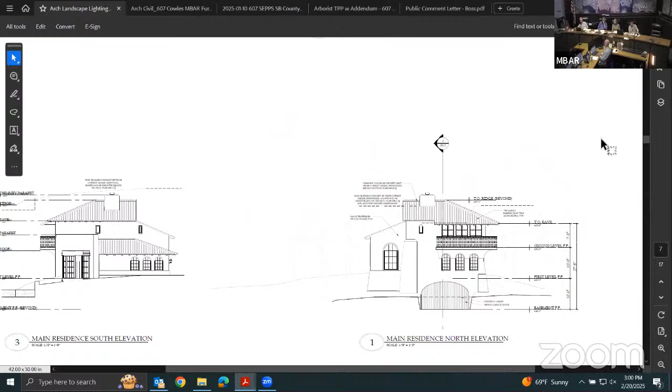We've also done this sketch - the sketch that's in front of you is actually done over a picture that we took on the site. So those are the actual oak trees and the exact thing the limbs are doing and the exact thing the hillside's doing, with the exception of what we're proposing, just for everybody's reference.

Then to show you the one other ramification of that elevation change - if you look at elevation 2, the top one, instead of having a monolithic square tower over that wing, we've instead wrapped around to that east elevation by having a large gable element, which we feel provides a nice bookend to the other southern wing over by the tennis court.

And again, it drops you down about 8.5 feet from the tallest point of what was being proposed there previously. Every foot counts here, and we hope that an extra 8.5 feet goes a long way to the community.

The other big part of this that we've changed is the landscape. If we could go a couple more pages down on this file, please.

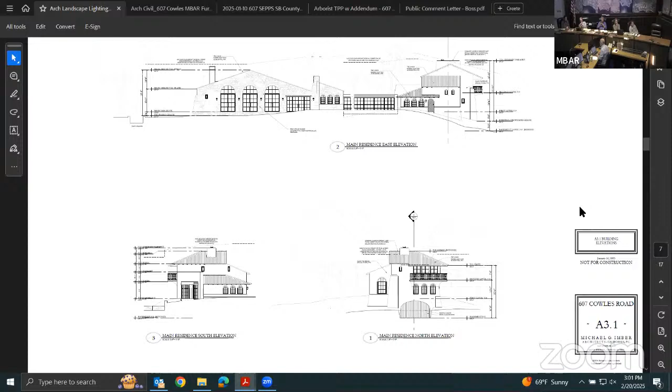I'll just do a very brief comment on it, and feel free to have interaction with Scott and Cheryl as you need. The last couple of meetings, there were comments about all the pathways crisscrossing the site. Now we've got two, so we've simplified it a lot in that central courtyard underneath the main anchor oak tree, there to the east of the southern wing of the house. In terms of a structured understory, you can see that we've made a really deliberate push here to start having groupings of plants instead of just having them scattershot around the site, while mostly letting the beautiful oak setting and the natural undergrowth that we have there right now just speak for itself and not meddling around it too much.

Confirm all exterior light fixtures meet code requirements. We have the lighting team on board. They've provided revised sketches and drawings that show that we're concealing lights to be dark sky. So that's our presentation, and happy to keep the conversation going.

Excellent. Questions, Tip, please.

Can I see the roof plan of the tower? Where would that be? That would be at the end of the other Arch document, I think the very end. Let's see now, can you zoom in a little bit? I can.

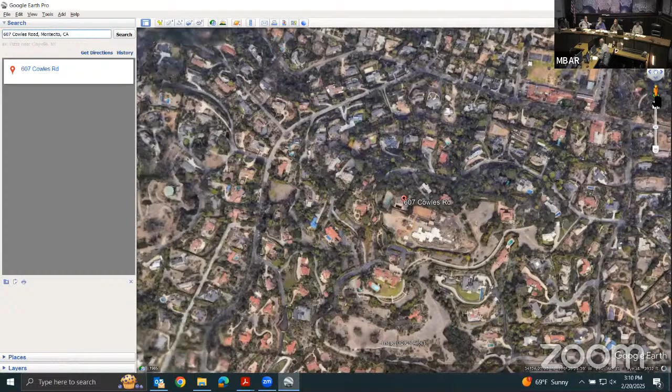And the original property was actually hundreds of acres, starting at the top of the hill. I remember walking it.

So the plan below right is what was proposed for the big site? That is a separate property and a separate project from, I believe, 2020, that was permitted but not built. Correct. And then up in the middle, we see the tennis court and the house you're proposing. Yes.

Yeah, okay, no more questions. Bob, questions please. I don't have any questions. As a result of the massive fires, I am reminded through one of my associates up here that all buildings in the code require 5 feet—no landscaping next to buildings, and no trees within 15 feet, right? Unless they're existing.

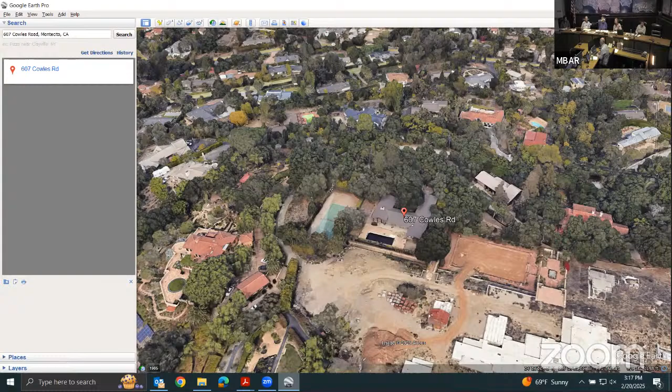Okay, so can we go back to the letter, please? So she'll drive by this every day.

The owner, as it is currently planned, the owners of the property and their architectural team have been very respectful of any concerns that I might have as a close neighbor. I have been kept informed about the plans for the property and find them excellent. I believe that the current design works well with the existing landscape and character of our neighborhood. I have heard that there has been a suggestion to create an additional building for the garages instead of having the garages tucked under the hillside as currently planned. I think the fewer structures the better, and that working with the terrain as planned will yield an unobtrusive building. Thank you for considering my comments.

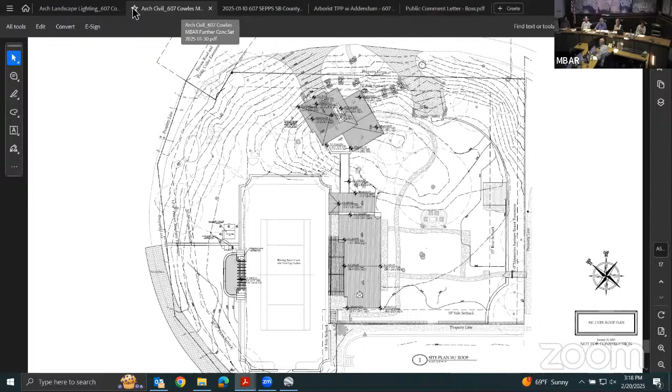We are here for further conceptual review, so there's no vote today. Let's go back through the same thing. Comments, Tip, where are you at with this project, please?

Okay, number one, I really appreciate that. I think it's a very beautiful rendering, and I think you probably picked the best view to do this rendering. I like it because I think the roof pitch is low, minimalist. It blends in well with the hill, and you can see the glimpse of the chimney, which I thought was nice. I think that if you take a look at the other elevations, they're probably not as successful as this elevation, this angle. With that in mind, I'd like you to perhaps carry this architectural style theme around the other elevations. Some suggestions: I think the chimney is way too large if you look at the other elevations, and I think the roof pitch is way too steep - I think you can get by with 3.5 in 12. And I'm not really sure that the gable would work for that element. If you look at that, I think it would probably be a very beautiful project. Personally, I don't mind cutting down the ground to have access to the garage - I think with the right landscaping, that would be beautifully done. So those are my comments.

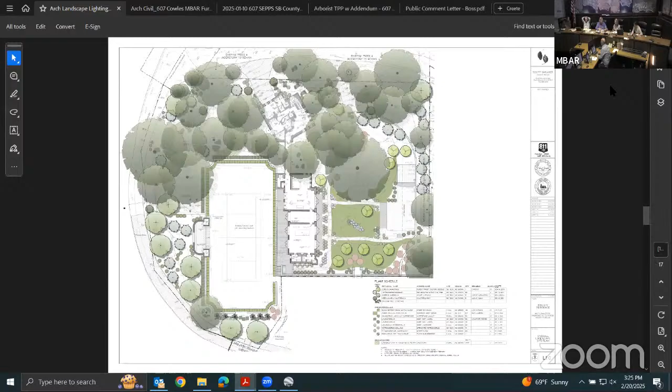Before we adjourn, I think this previous project on Hot Springs illustrates a problem that exists with our zoning laws, which allows projects to average the setbacks. If they had to stay within the 10 feet on this, there'd be sufficient landscaping and things like that. I would like to have a discussion item about this, and whether or not we want to make a recommendation either to the MPC or to the board about considering that. That's not today, but would other members like to have that discussion as well?

Are you okay with that? Yeah, so can you talk to planning staff? The ADUs use that provision to cause the situation we saw today. So can you talk to planning staff? I think we'd like to have it soon, but whenever it's convenient for Alex and his team.